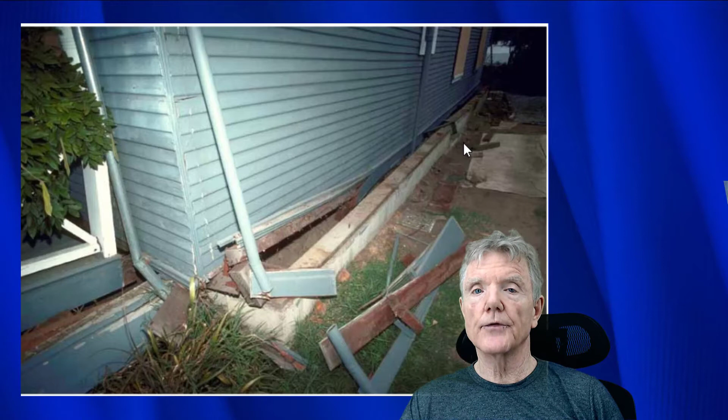Before looking at placement and size of bolts in the retrofit standard, it's important to know what's already there. There actually is already a pretty good connection. The contractors could not have built these houses if the mud sills were not secure. So I'm just going to show you some photographs that tell us why we know that.

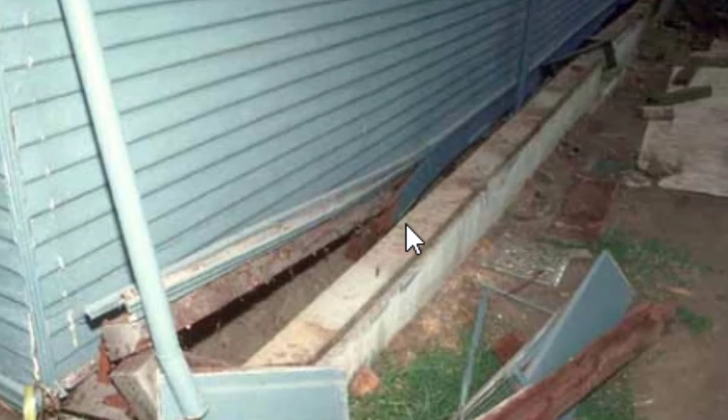And so here we see a case where the house obviously slid a foot or so. And if you can see right here, the mud sill is exactly where it was to begin with. So here's the mud sill, there's the concrete, there's been absolutely no movement at all. The only way that could happen is if there had already been an attachment of some type. Here's a photograph that shows us the exact same thing.

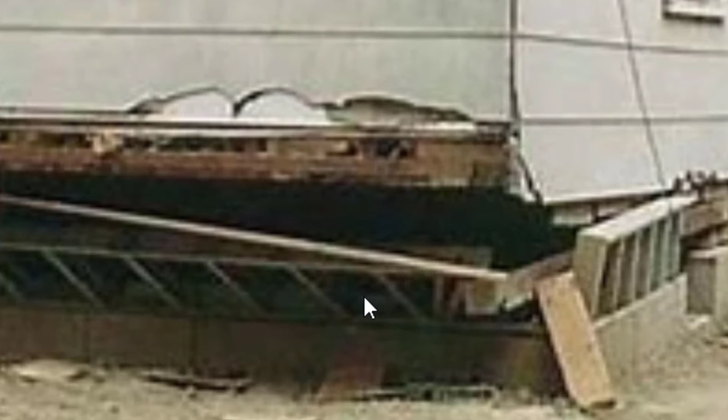Obviously the cripple wall has collapsed, but notice that the mud sill has remained exactly where it was before the earthquake. So the mud sill runs all the way along here, and it's still attached to the concrete. We have the exact same thing over here on this side. There's the mud sill, and it is still attached to the concrete.

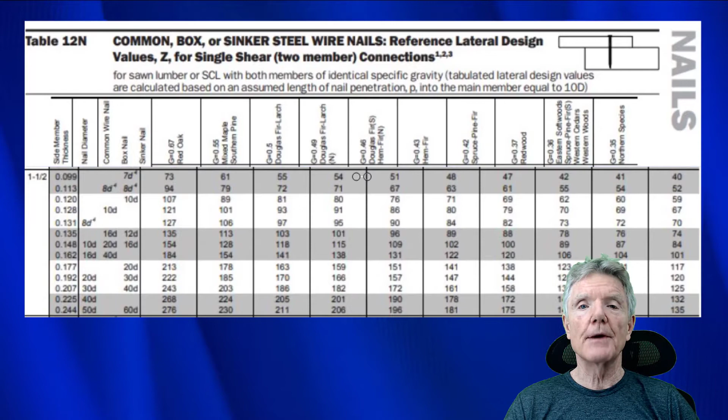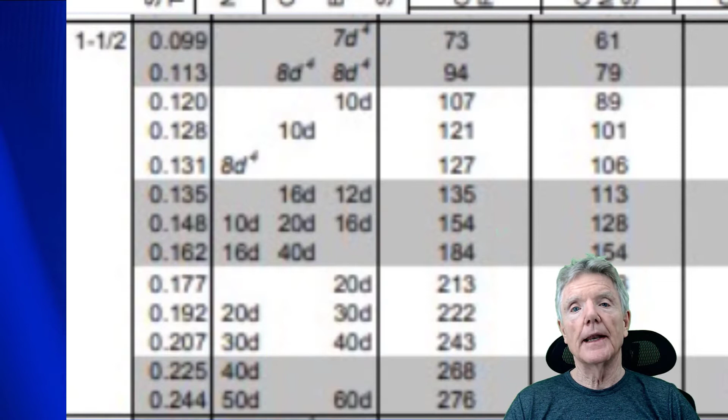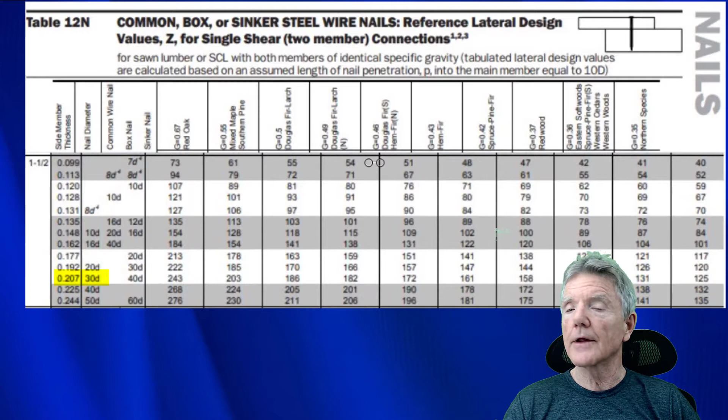In a second, you're going to see a segment of a video that I did previously on a similar topic, and I really wanted to point out that we're talking about 30 penny nails. There's a connection between the existing sill and the concrete with a 0.207 inch, 30 penny nail, and they have a lot of lateral capacity. In fact, when I did some rudimentary calculations using the NDS, it was around 230 pounds per nail. So when you see a nail every 32 inches on a sill connected to the concrete, that's already a pretty good connection. What they don't realize is that in order to build a house, you can't just have it sitting there with gravity.

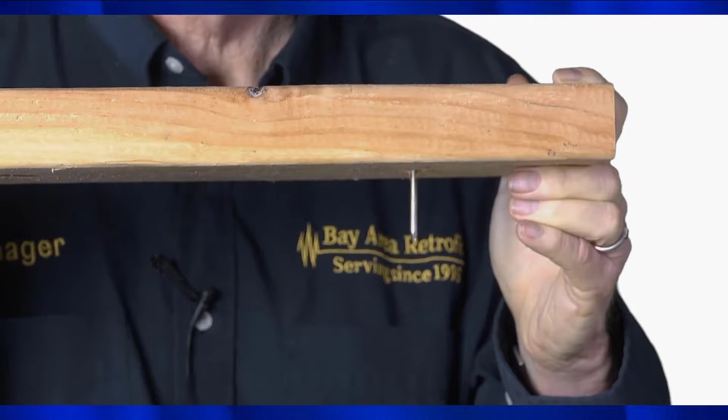You start banging on it and the thing's going to slide off. So in the work that we do, we've taken a lot of these apart. And the way they used to do it in the old days is they would take the mud sill before it was built, and you see the nails right here. What they do is they take the mud sill, they drive nails straight through it, okay? And then they would take this and they would smush it down into the wet concrete.

That's the way they used to do it in the old days. And these nails would be really big. They're almost 1/4 of an inch. Regular bolts 1/2 inch. They put these about every 18 to 32 inches, so the mud sills don't slide off. And I've never seen a photograph of one that slid off. If you happen to see one yourself, I'd like for you to send it to me.

What I'm trying to show here is that even though it may not look like a house is bolted, in other words, that the mud sill is attached to the foundation, if you were to take a metal detector or you were to sand the top of the sill to see if there are any nails, there are some nails there, and there's quite a few nails there. And again, the carpenters could not build the house if the mud sill was flopping around all over the place. So they really made sure it had good connection.

And the other thing is, a lot of these old houses were built when there was a guild system, the early unions, and they had training, master to apprentice, where they said, this is the way you put a mud sill, and this is the way you attach it to a foundation. And there was some very interesting work done by the Structural Engineers Association called the Rockwell tests. And in these Rockwell tests, they actually traveled all over the country to see how old houses, especially brick buildings, were built, and they found that they were the same.

If you went to Oklahoma or you went to the East Coast, generally carpenters built things the same way, and what they determined was that it just passed on from a master to apprentice as the country evolved. So we see this very, very consistently, and this is the sort of thing that you can assume is there before determining how to bolt a house.

So the houses we just looked at are the ones that were built when there was no building code in effect. Now the other set of houses are those that were built under building departments that had adopted the Uniform Building Code. That was the first building code used in California, except for local ones. For example, San Jose had one that they had adopted, I think, in 1890. But then they adopted the Uniform Building Code in 1927. And other cities, piecemeal, did the exact same thing.

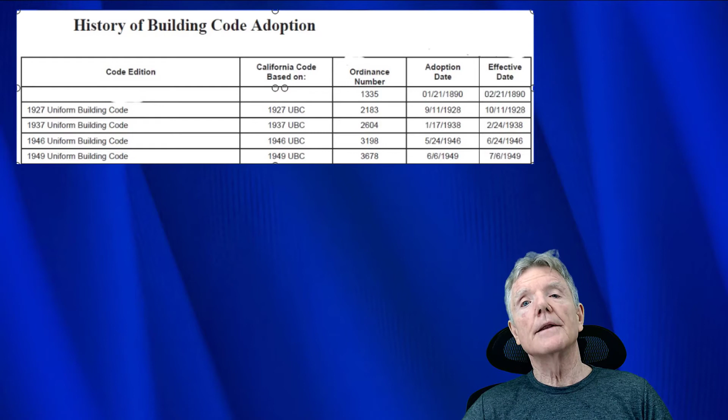You never know for sure. But when you crawl into a house and you see a bolt and then you see another bolt 6 feet apart, you know that that city had actually already adopted the Uniform Building Code. So of all the houses in the Bay Area, you're going to either find houses that are well secured using these very large 30-penny nails, or you're going to see houses that have bolts every 6 feet. That's all you'll see. So when determining how many bolts and where they should go, these things should be kept in mind.

I discussed this with the original chair of the Standard Plan A Committee, Jim Russell, and we determined that it made no sense to put in any more bolts than were absolutely necessary, because basically the whole thing is already bolted. Mud sill is not going to go anywhere, but it is important to have enough at these shear wall locations, and that's why in these tables, the original table with Standard Plan A, it says a certain number of bolts, and that's all you need.

However, later on, other people annotated the standards so that it ended up being the same as brand new construction. Put a bolt every 6 feet, within 12 inches of the ends, and it just ended up being a really expensive enterprise when we were trying to make seismic retrofitting cheaper by having fewer bolts, recognizing the bolting that is already there, and only putting them at the shear wall locations where all the load would end up concentrating. So that's the way it was supposed to work.

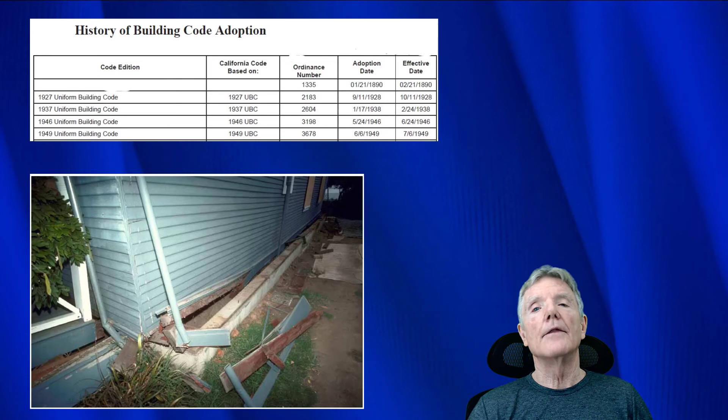Standard Plan A was designed that way, and that is a predecessor to this standard right here that has the table which specifies a certain number of bolts. The original assumption, based on the original table with Standard Plan A, is that there's already some very good connections between the sill and the concrete, and those should be taken advantage of.

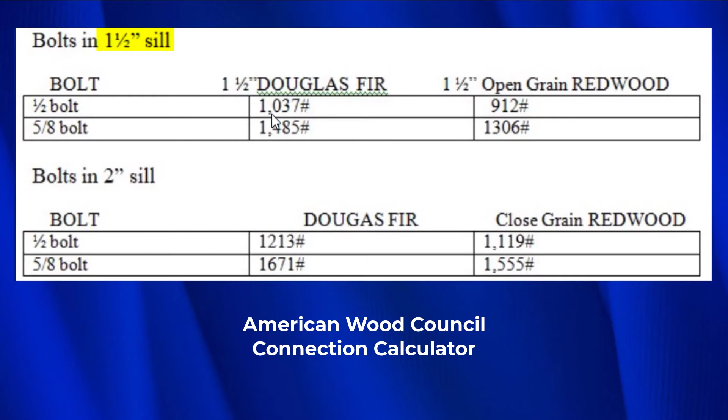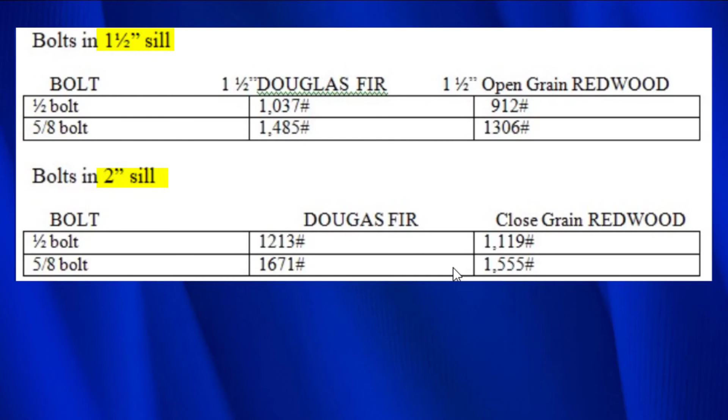The same thing when you go down into the bolts with the 2-inch sill, we have a 5/8 bolt, and it goes into Douglas fir at 1,671 pounds. Now the reason that value is there is because, as I was told about Southern California, I've never seen it myself, the sills are a full 2 inch thick, and the older homes are the ones that need to be retrofitted, and these bolts can resist that much force. And then when we go into the close grain redwood, we end up with 1,555 pounds.

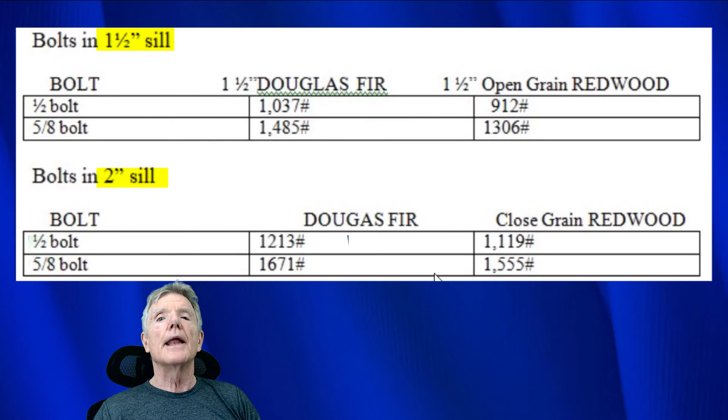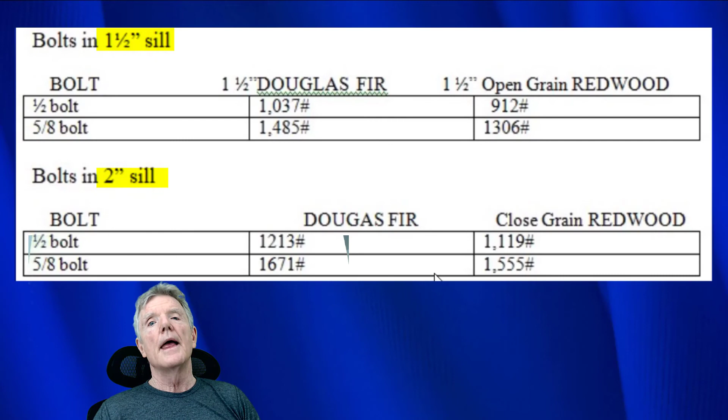Now, close grain redwood and open grain redwood are defined as follows by the Redwood Association. If it has more than 8 growth rings per inch, then it is considered close grain redwood, and if it has less than 8 growth rings per inch, then it is open grain redwood. And primarily what we see in the San Francisco Bay Area in these older homes is the close grain redwood.

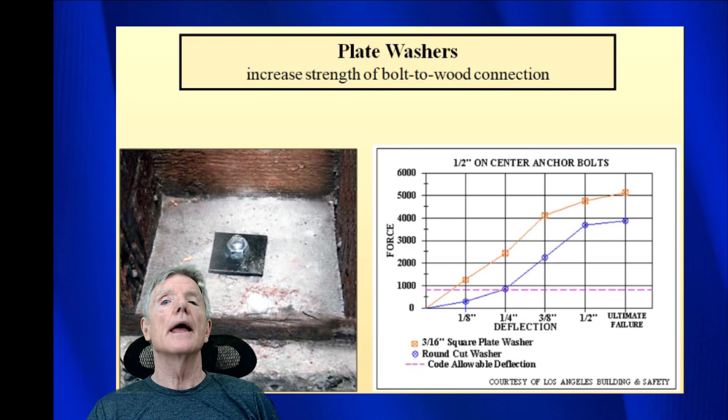In a previous video on the history of seismic retrofit codes and guidelines, I mentioned that I flew down to Los Angeles after the 1994 Northridge earthquake to find out what they had discovered. And this chart right here is one of the things they gave me, and it's really important because it talks about what plate washers actually do and their impact on bolt performance. So here it shows us that at a code allowable, at that time anyway, a 1/4 inch deflection occurred at about 900 pounds if you use the round cut washers. But if you use the square washers, it went up to around 2,300 pounds. So that's a huge difference.

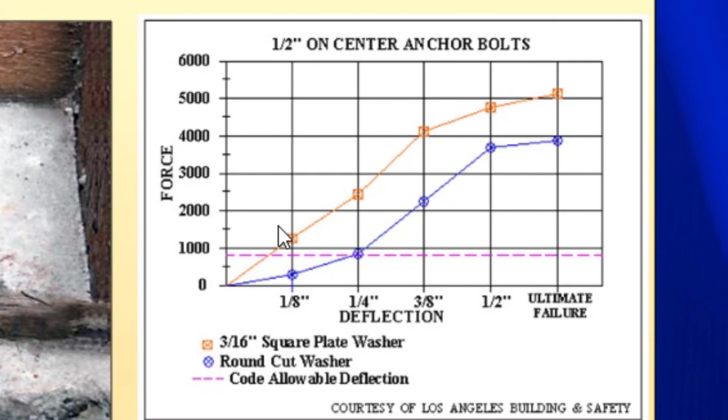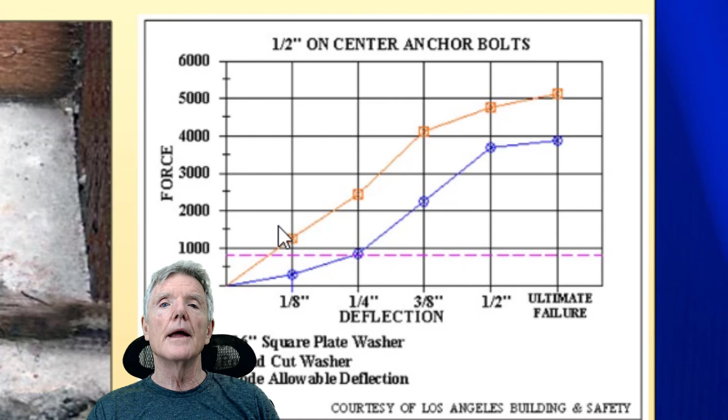And I don't know where this data came from. I know the building department gave it to me. I still have a copy that they gave me that shows this graph right here. Who did the tests, where the data is, I have no idea. However, it would be really handy if someone from the American Wood Council or Virginia Tech could do some tests and find out how big of a difference these plate washers make. And I don't think that the National Design Specification takes this into account. So maybe the values that I just gave you for bolt strength are not accurate. I don't know, because in all retrofits on the West Coast, we do use plate washers on everything, especially in the San Francisco Bay Area.